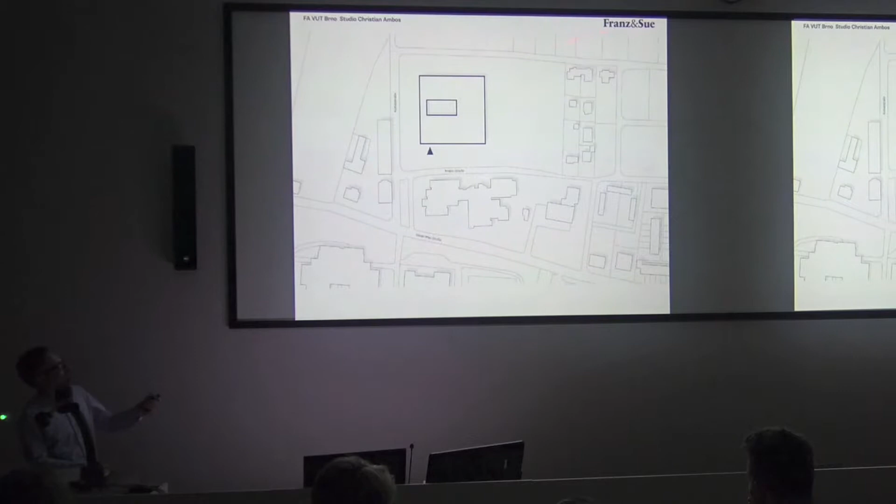Tyrol is a mountainous area in Austria, there's one main valley going through the whole province, which is very densely populated. But there is no urbanity within this, except from the old city centers. There's just urban sprawl going on all around - you have a lot of small houses, bigger houses, and some structures. You cannot really - this is a hospital - you have all kinds of different structures, but our program was so huge that we found it's not...

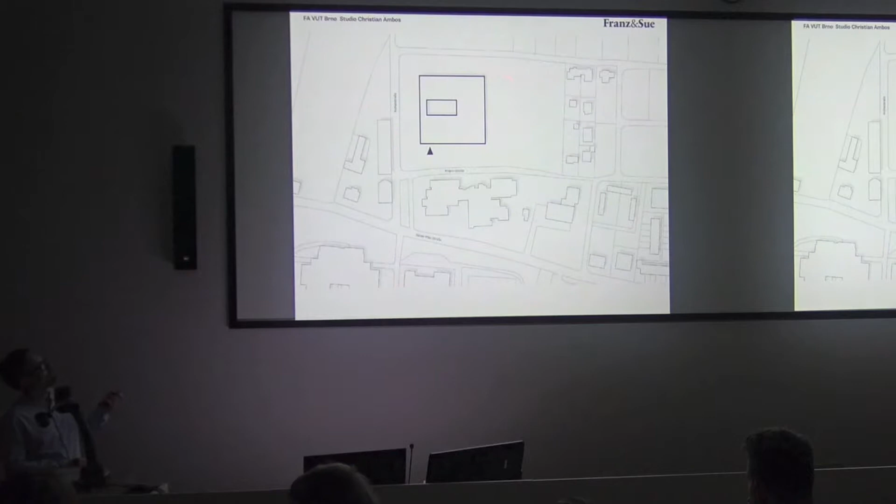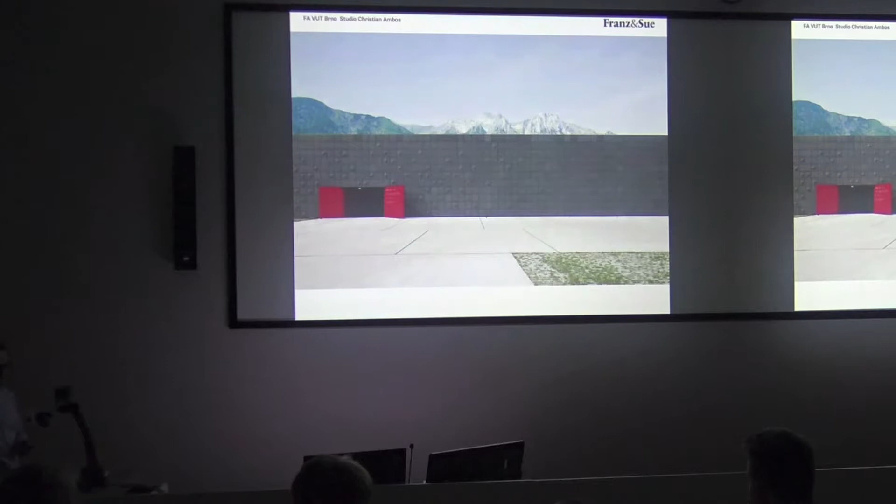It would be necessary not to show up everything on the top level, but to place the program, to dig it into the earth. So you see only 1/3 of the program on the outside. It's like a strong, rigid cubical design, which is strong to the outside and has two faces. There's only one entrance, you can see here, and everything else is more or less closed or oriented toward the inside. This entrance door can also be closed during the night, so it's like a big safe container for all the very precious archive for the Tyrol museums.

The idea is having a strong outside, but designed like onion rings. On the outside you have all the archives that don't need air and light, and we have the offices and workshops orientated towards the courtyard. So the courtyard, the inside, is completely different to the outside. And there is one ring corridor going around.

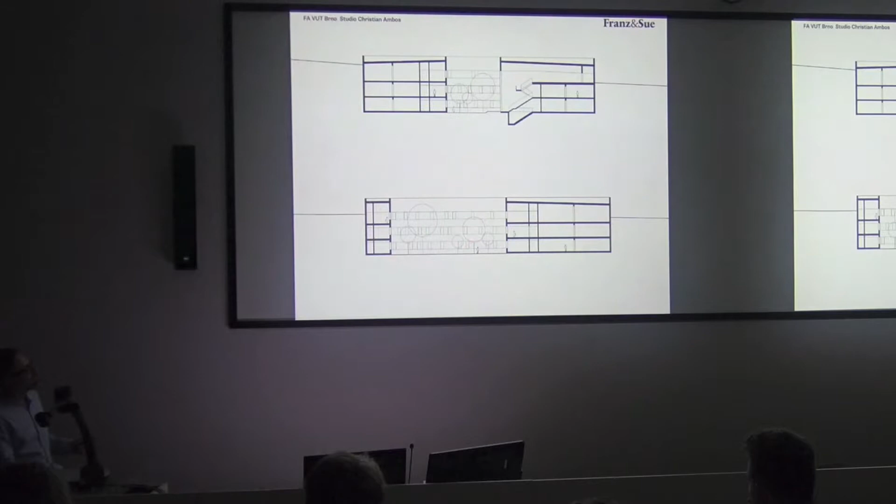This is the entrance. From the outside this is like the surface. You're entering here, and you see a one-story building, which is cut into the earth. On the inside you have a completely different experience. When you stand down there, you don't think that you're 3 stories underground.

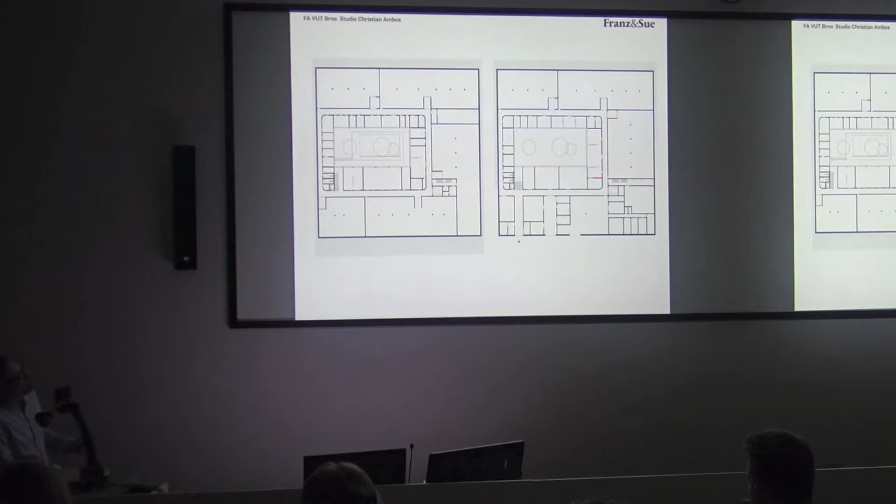This is the ground floor entering here, with the corridor going around, archives on the outside, workshops here, archives here, and the offices and workshops for people towards the interior courtyard.

When we design, we always think of values in terms of architecture, and what kind of value would represent this building. It's foremost consistency. With all these precious items inside, you should say to the outside, this is a safe building. Everything finding place here is safe. And also self-confidence.

This is the side view, the facade to the side. There's one contribution to the need of having air in the workshops area here.

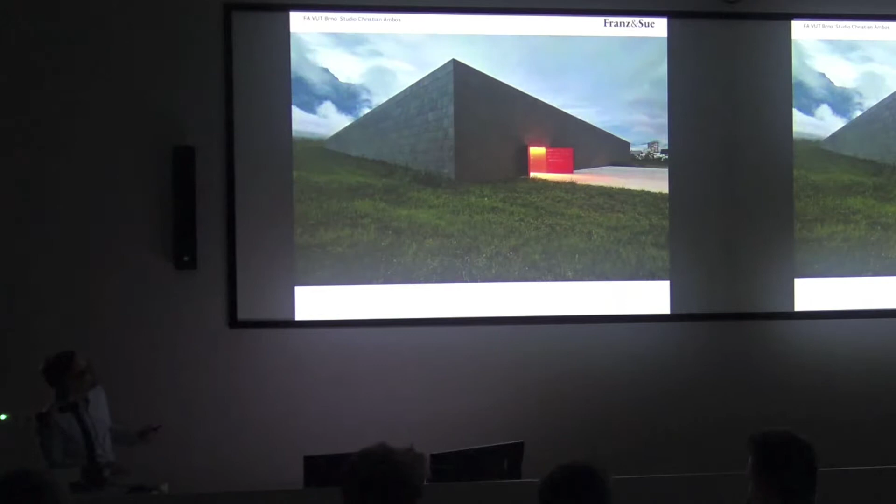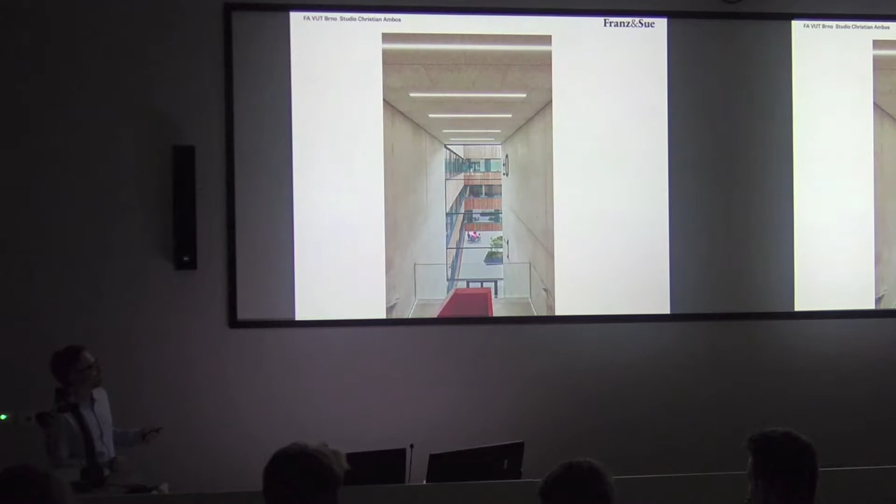The entrance, and this is the staircase. When you come inside the building, this is like the ground floor, level 0. You're going down 2 stories, and here you can already see the interior courtyard.

There is one thing for easy orientation. This kind of corridor always has glass doors that you can see from the corridor towards the inside courtyard, and they give an orientation of where I am. The good thing about digging into this whole structure is that you don't have any climate problems.

You need a stable climate of 16 degrees with a certain humidity, and this is provided by placing like 2/3 of the facade into the earth.

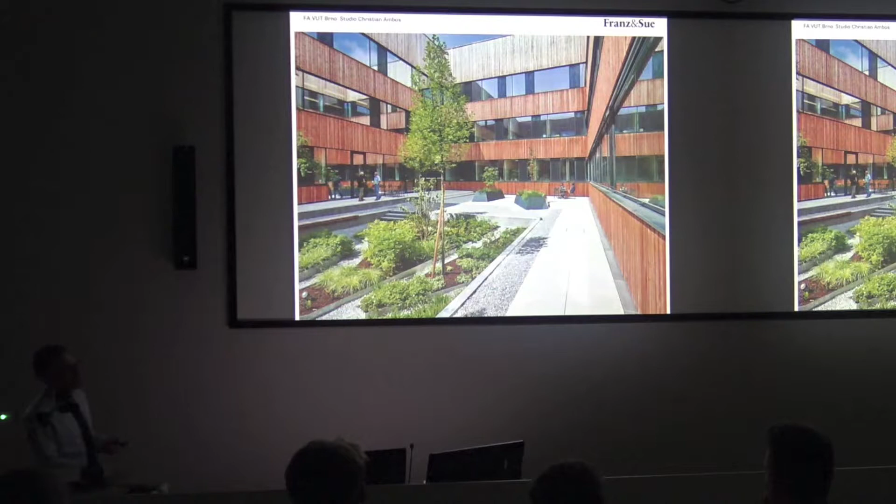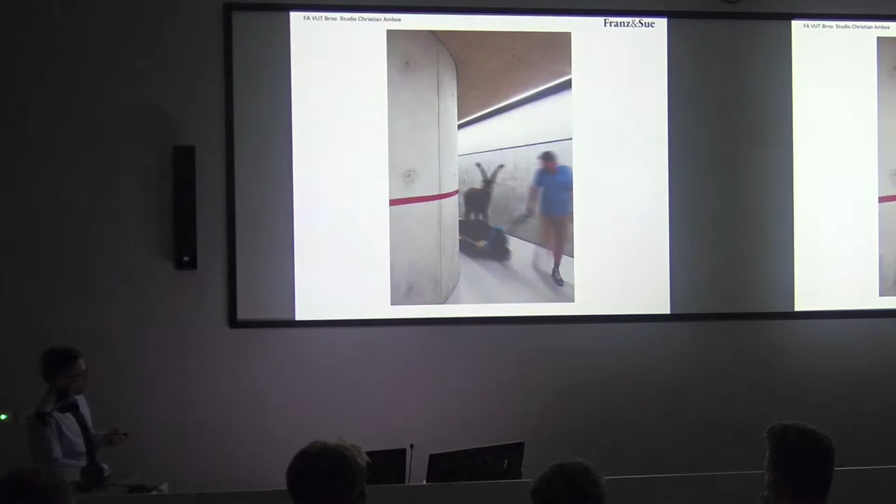This is the interior courtyard, which is somehow designed like a cloister courtyard. And here you can see some pictures of the archives for paintings. We also have stuffed animals there, which is a bit strange. A second project I want to show you is the Provincial Court in Salzburg.

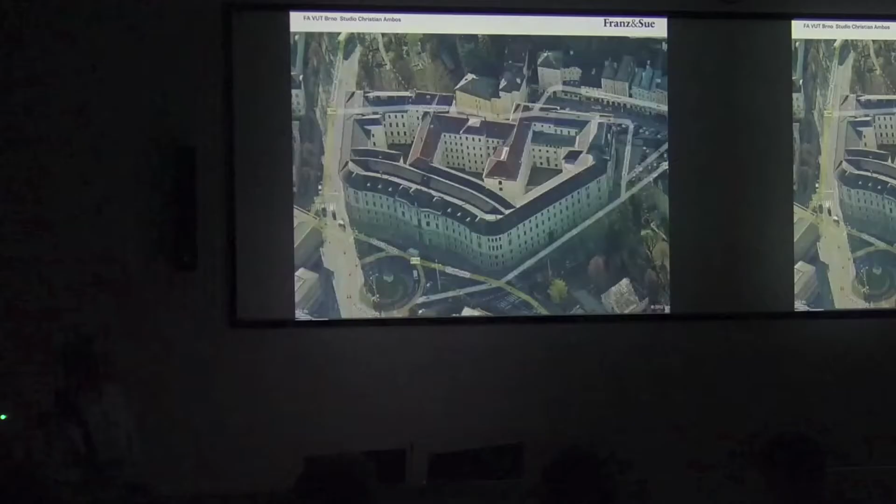This is a building that exists from 1905, designed by the architect Alexander von Wielemans, who did a lot of projects within the monarchy. I think there's also a project in Brno, a courtyard building. He designed this with the black roof courtyard building and the red courtyard prison.

The values of that building were representation, to show off, to show the majesty of law, to tell the people that everything which is decided in this house has value - it's not to be asked anymore.

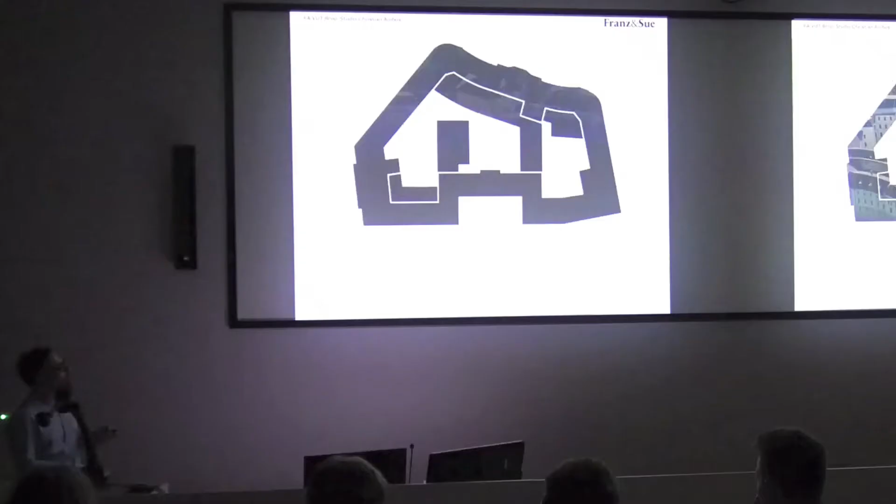We were lucky because the prison moved out, so the program changed for that reason. We could demolish these two blocks because they were more recently built in - the building itself is a heritage listed building. So we had the possibility to restructure the whole complex. This is the former Provincial Court, this is the prison, and we demolished all the buildings in the inner courtyard to create a new ring.

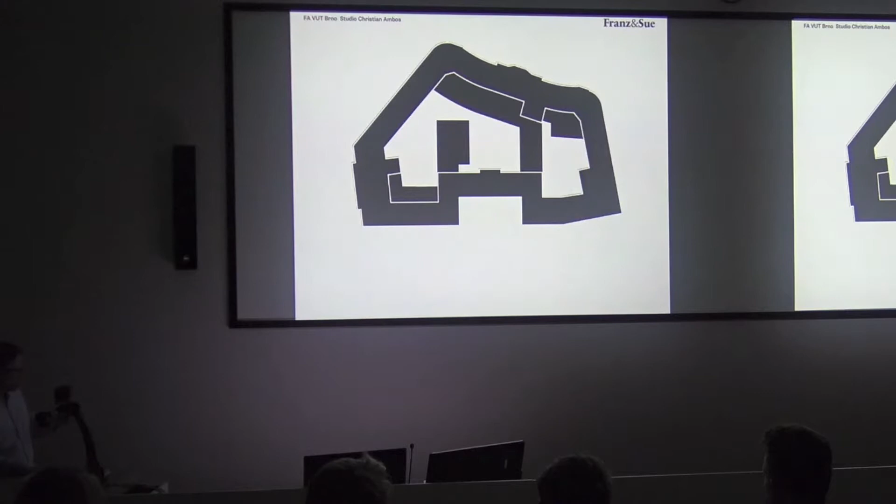There were numerous entrances towards the inner courtyard, but you couldn't use the inner courtyard. You could use only this entrance to get into the building, and all the other entrances were closed for security reasons. So we introduced a fourth entrance and made an open space, a public space here. You can enter from four directions, cross the building complex, and have a small break here.

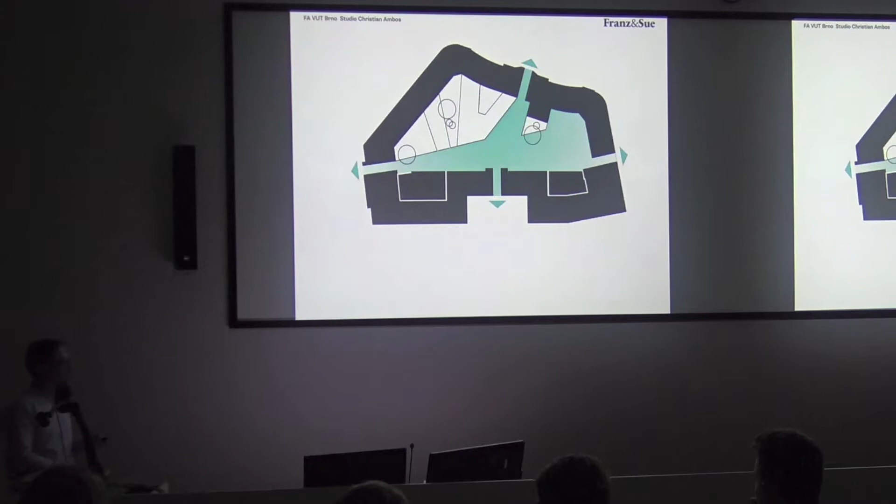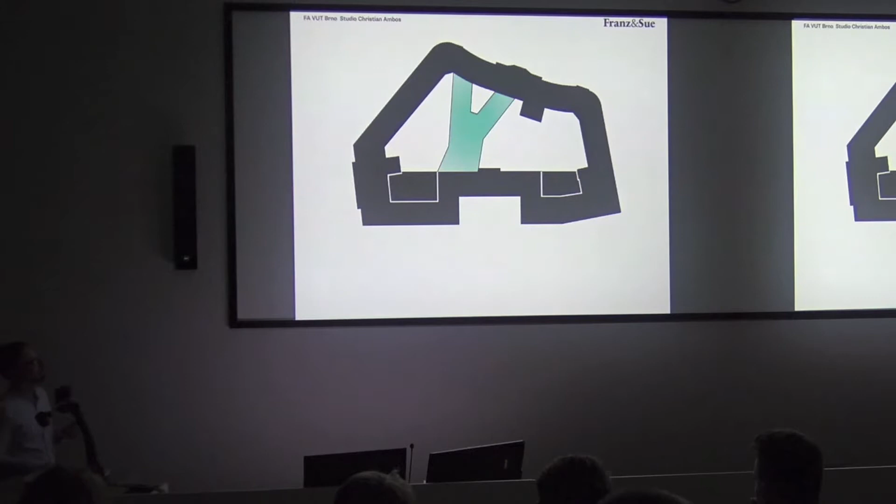It's like an interior courtyard. The next step is we built a new Y-shaped building in the inner courtyard that contains all the courtrooms. So except for three historic courtrooms on the outside ring, all the offices are situated on the historic part, and all the courtrooms are within this Y-shaped new building.

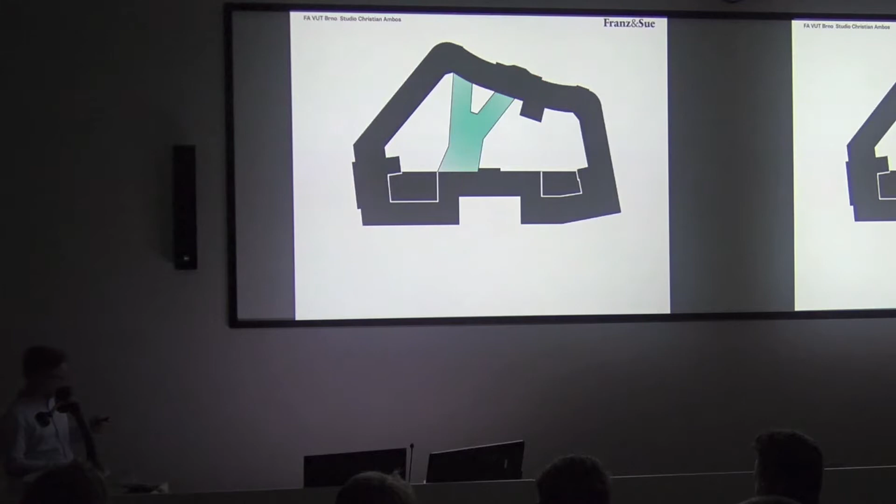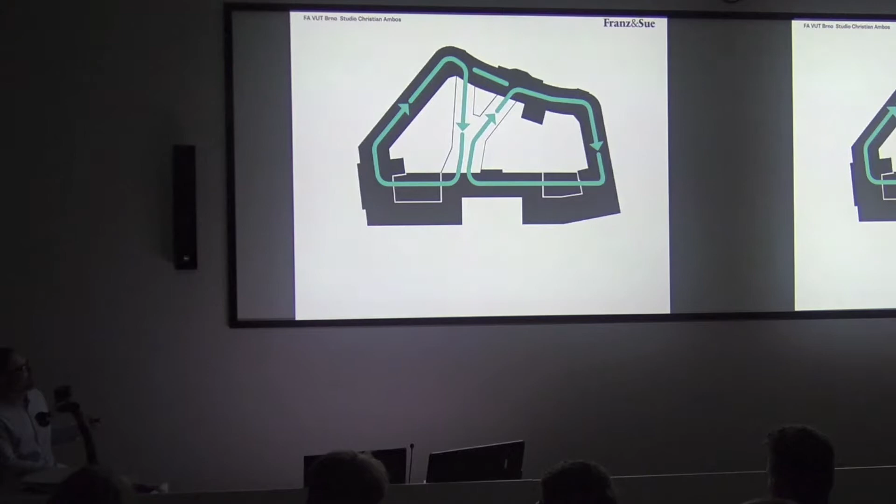The whole structure made it easier for orientation. You can now follow where you are if you walk in the corridor, and you can have the big round or a small round in the Y-shaped building. As you enter, there's already an atrium going through all the stories, so you oversee the building quite easily, even as a foreigner who doesn't know it.

What are the values we want to transport with a new courthouse building? A court should be independent, and it should have equidistance to all the parties that take part in a trial. You should trust on a verdict. So accountability and transparency is something quite important for a courthouse building.

And things that didn't change - you still need dignity. The people have to accept what's going on in a court building. So dignity and self-confidence is also a really important value for a court building.

The site plan, I already told you. We have four entrances and one main entrance into the building. When you go into these historic entrances, you just bypass the building on the ground floor and walk into the inner courtyard.

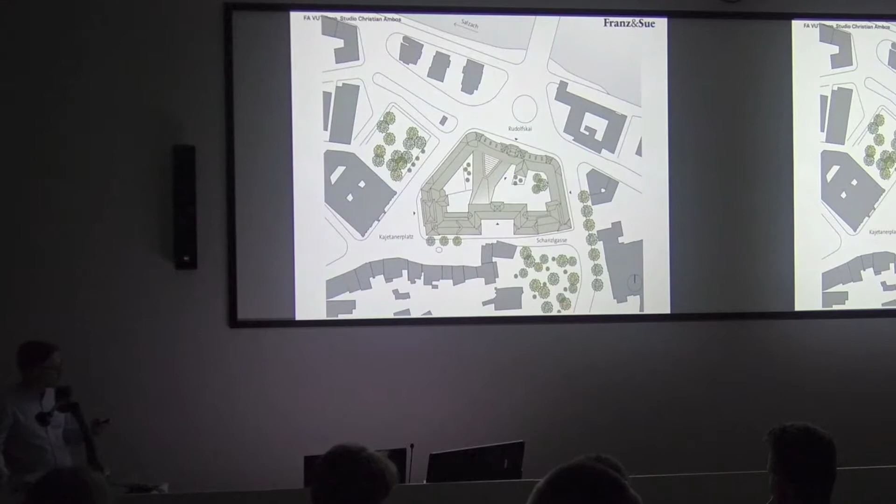As there are different levels, you enter onto the first floor, overpass here, and go down again into the lower courtyard. There's also an archive in the basement, which gets some light with this court.

When you enter, there's a security pass, and here we've got the service center, the first place where you can go when you enter the building. And here you have the atrium. The atrium is five stories high, and it provides easy accessibility and the idea of how this building works.

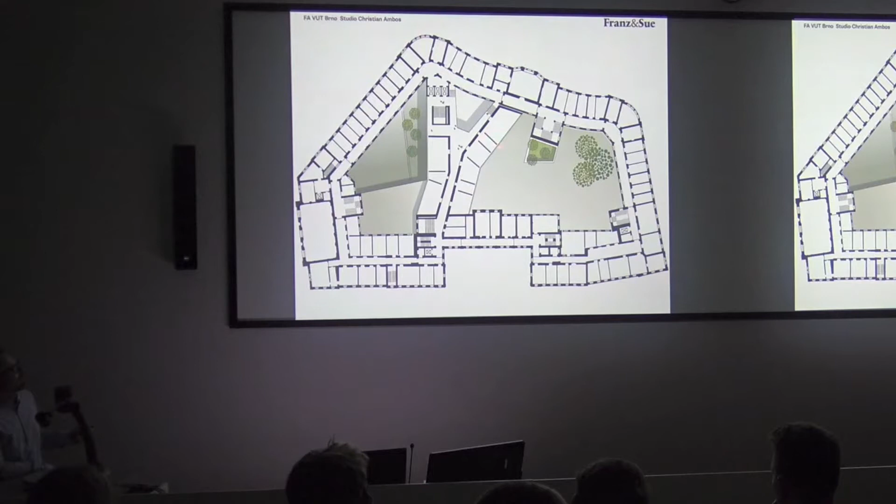Here we have a regular story with six courtrooms, and always a meeting room in between two courtrooms.

You can see into the courtrooms, you can have the idea of what's going on in there. Trials in Austria have to be public, so everybody can attend, and you can already get the idea of what's going on from the outside. So there is something going on which should not be concealed - for that reason, we make it visible.

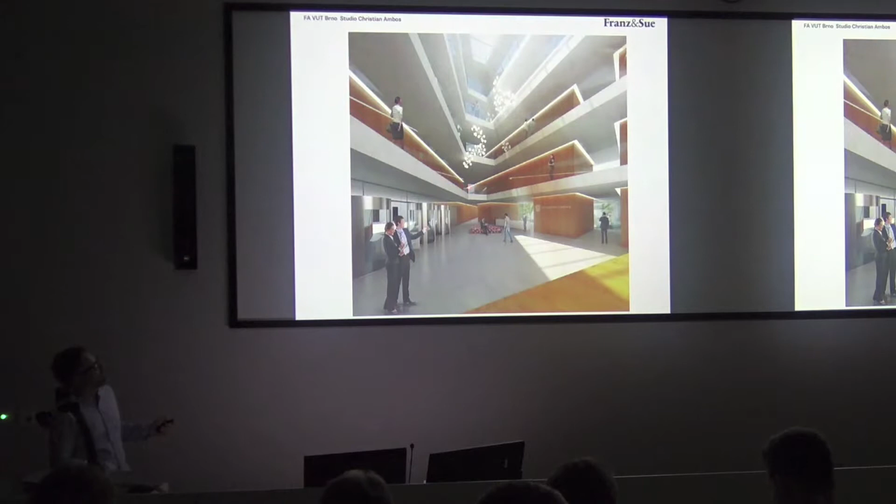When you enter through the safety control, you are within this atrium with a glass roof, so you get some light in, and you can already see the areas in front of all the trial rooms.

This is what it's looking like right now - this is the Y-shaped building. On top of the building we have a small cafe with a terrace. It's quite a scenic construction style, I guess. Here you have the idea of this Y-shaped building.

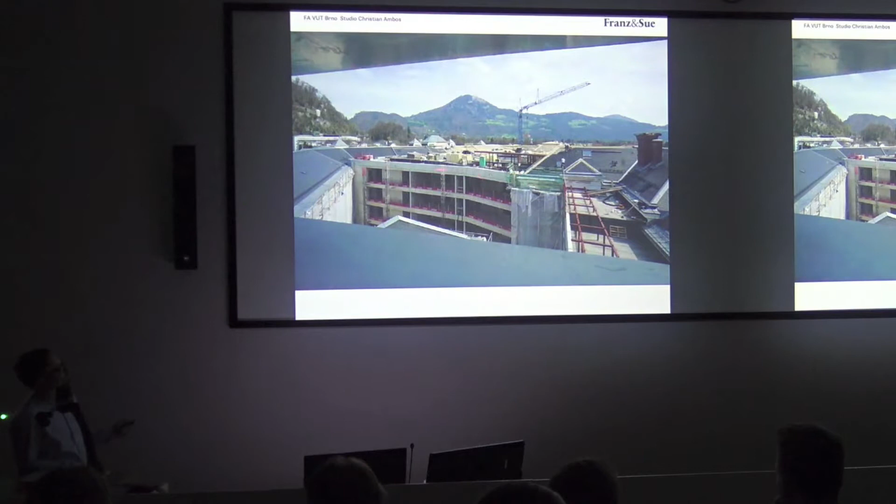The idea is that there are some sort of slabs that are shifted within the courtyard, and that are cantilevered or make a bridge within the old exterior walls.

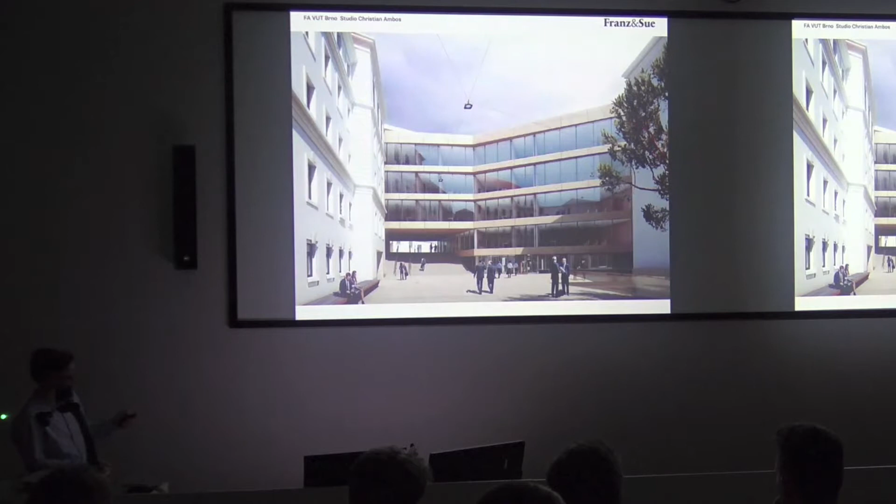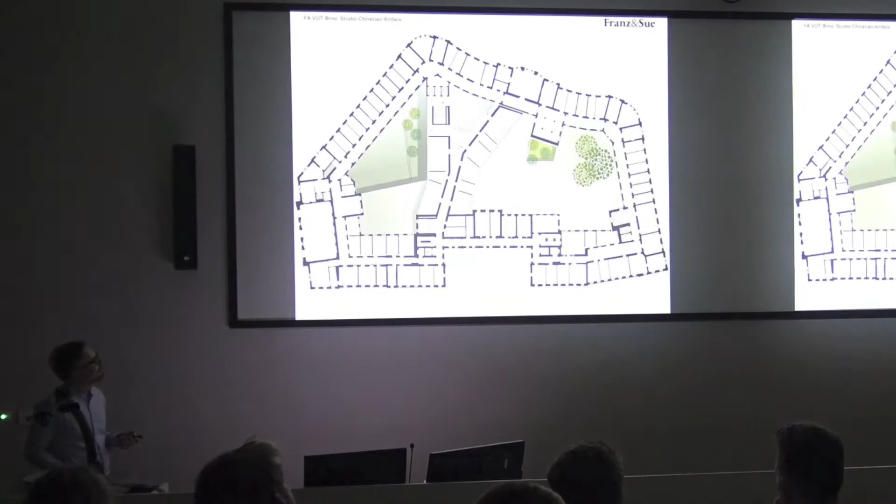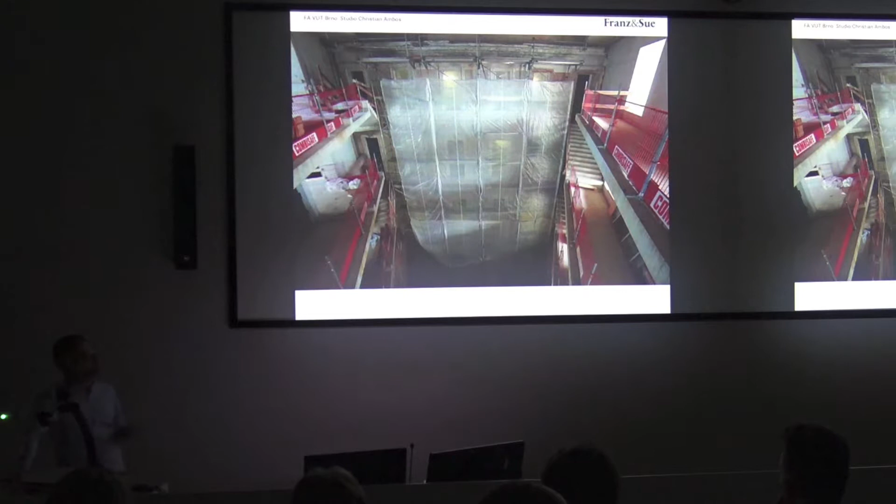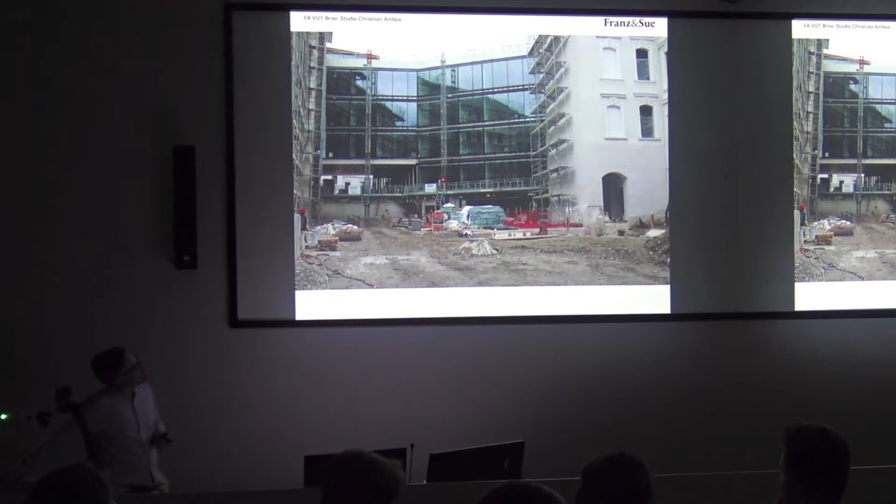Here we have the glass roof, and this is a meeting room right now in the Y-shaped new building. Yeah, this is how it looks like from the outside right now.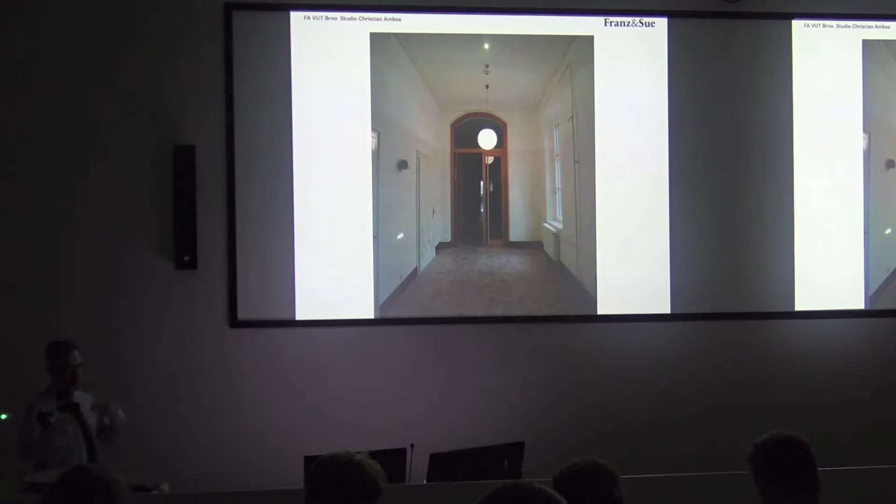You saw mostly parts of the new part right now, but it's also about 20,000 square meters of old building, a historic, listed building, and we are dealing with a lot of different kinds of tasks and issues with an old building. It's also a very interesting issue for me to think about how to work with an existing building, how to bring in a new design with some small changes, how to think about the way an existing building is working in a new way.

Another project I want to show you is quite a difficult task: a detention center for illegal immigrants.

A few years ago, when the competition was published, we were thinking, is it a good thing to take part? But we saw that the assignment was quite open, and what was asked had a very humanistic approach. So we said okay, we could enter. We can make a good contribution on that.

This center is for people who are not criminals, but they have to be detained as they are already in the last step of their asylum procedure, because the authorities think these people will live as submarines once they have a negative asylum decision, and they are not allowed to stay in Austria. Legally, some are detained in order to bring them back to their home countries, but most of those people didn't do any crime. So we said, we don't have to deal with criminals here. We have to deal with people, as criminals are also people, but we have to show them, in this last moment while they are in Austria, that also with these people we think it's necessary to have a humanistic approach.

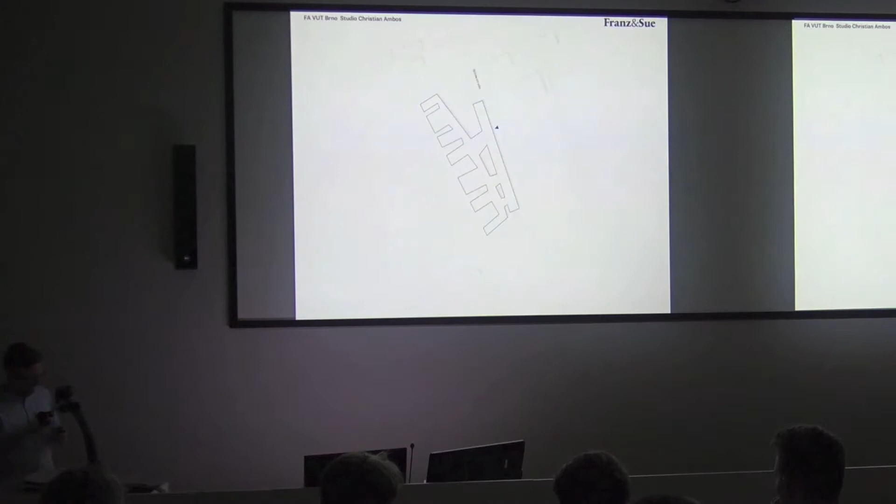The assignment said you don't need to build a wall like in a prison, not on all sides. You only have to build a wall toward the street. On the other side there's a creek running through the valley, and a steep mountain with a forest, so on that side you don't need the wall. You only need it on the street side.

We said, okay, we use the design of the building and make two parts. One part is the building for the authority, the offices, with a very rigid facade, and that facade is already our wall. On the other side, the more freely designed area is for the detainees, where we always have a courtyard adjacent to the rooms. The middle part contains the facilities, like the library, the fitness room, the room for religious services, and the shop, so this is where the offices and the detainees meet.

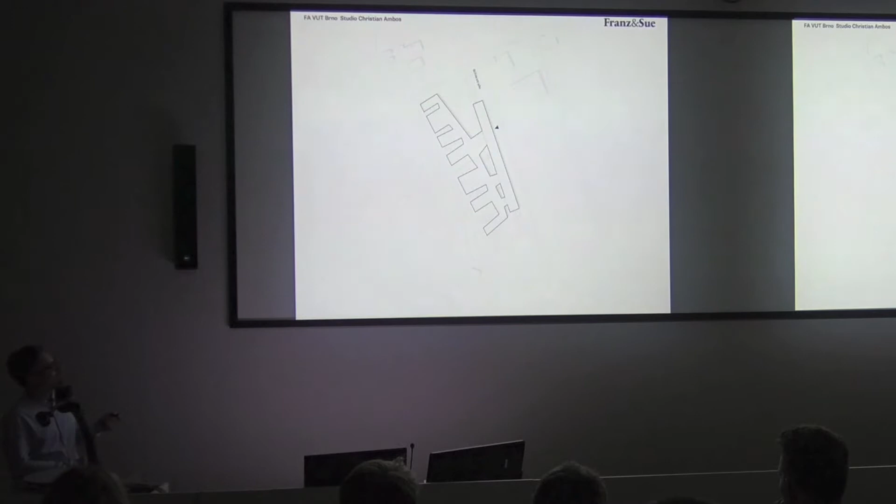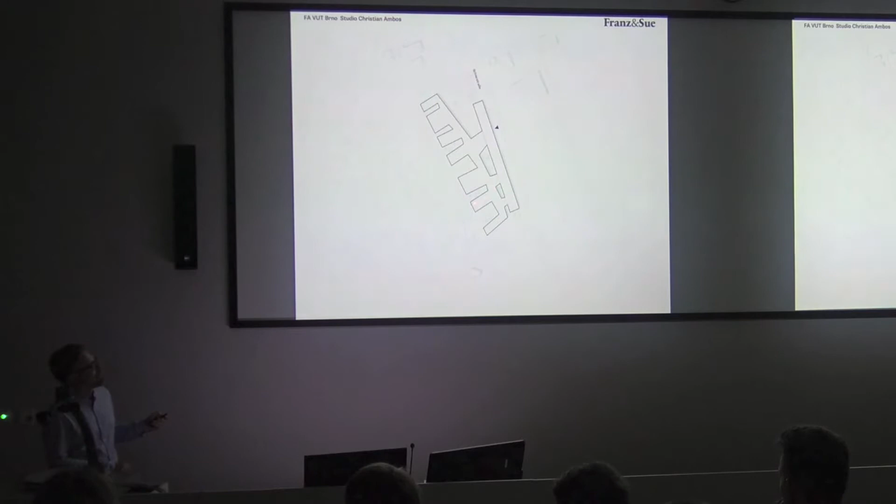Usually the typology of a prison is one finger with cells on each side, but we wanted to split it up. We have one unit on a U-shaped courtyard, always U-shaped, so you can see into the courtyard, you can walk into it, you can use it. The people can move freely within their unit. There's one unit here with an outside place they can use, a kitchen, and besides the sleeping rooms, several other rooms they can use. Here you can see the connection between the rigid office building and this kind of dwelling unit, where the facilities - the meeting room, prayer room, shop and so on - are located.

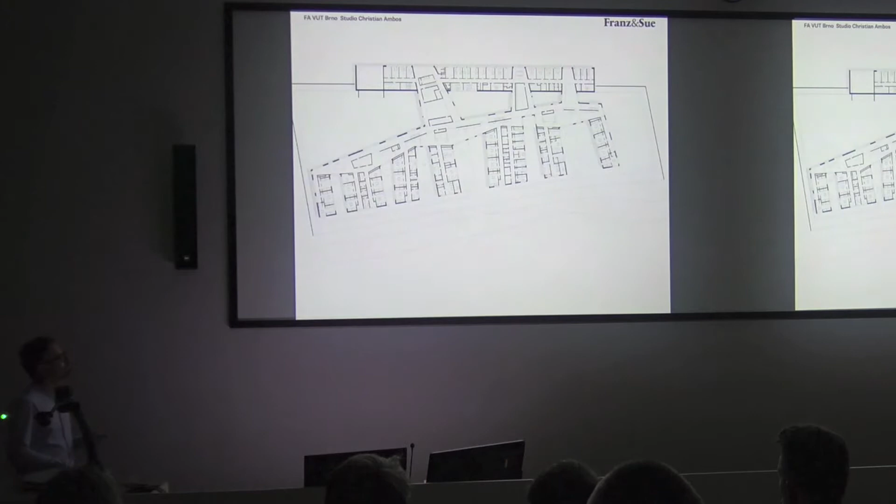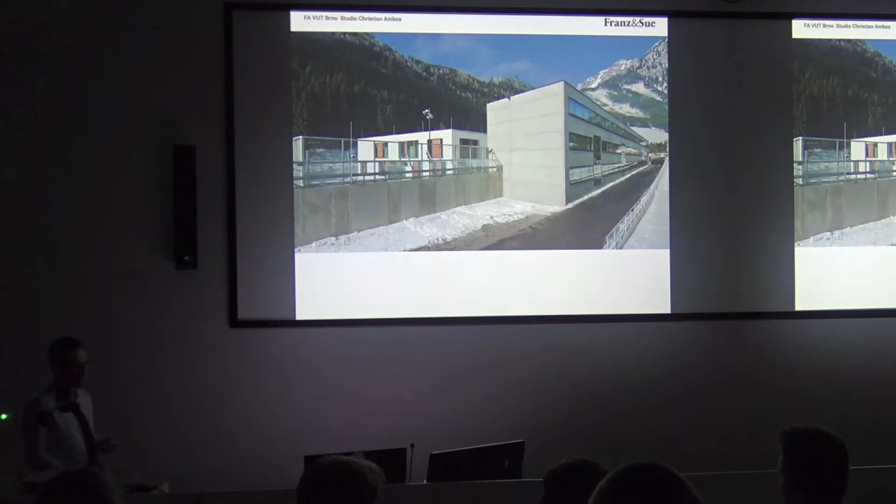We dealt there with little details. It doesn't work like in a prison - the guards cannot shelter themselves. When they are in this guard unit, they are talking to the detainees at the same level. There is no upper or lower level, and people here can see what's going on inside.

So these were 3 public projects we did or are doing right now, and now I want to show you 3 housing projects we were doing, or are currently doing, in Vienna. I want to emphasize on each project a specific topic.

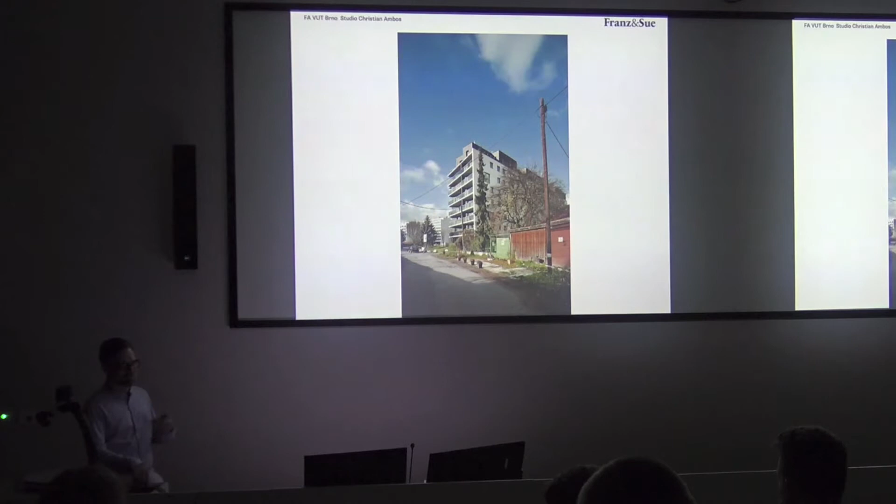This one is called Mittelweg, a housing estate for about 80 apartments in Vienna, placed in Simmering, a district with the world famous gas tanks. The whole area is being built up right now with multi-story housing, but in the vicinity there is still greenery, small-scale gardens, and old industry which is on the decline.

So this is the lot, and we were asked - the law says you can build a large building here and a point building here - and we developed two kinds of typologies for these houses.

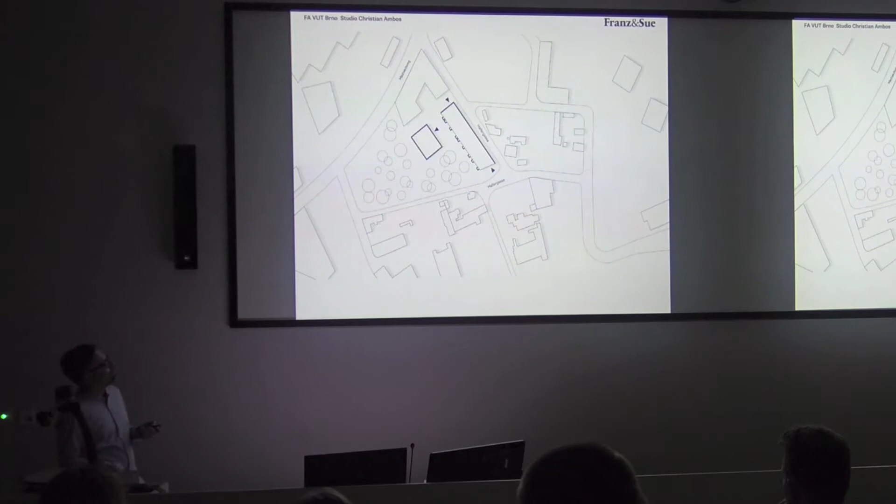This is the ground floor. The slab building is for houses, mostly small apartments, and the assignment asked for doing houses especially for elderly people, but also being able to change typology within the house, to have small apartments and different typologies within the house.

So the typology we proposed: on the south side we have deep, rather small apartments. This is the ground floor, so you have facilities like bicycle rooms and workshops onto the street, and 3 staircases with elevators, and the main entrance here. You can walk down the street on the inside to get to your elevator, to your apartment. The ground floor apartments have a garden of their own.

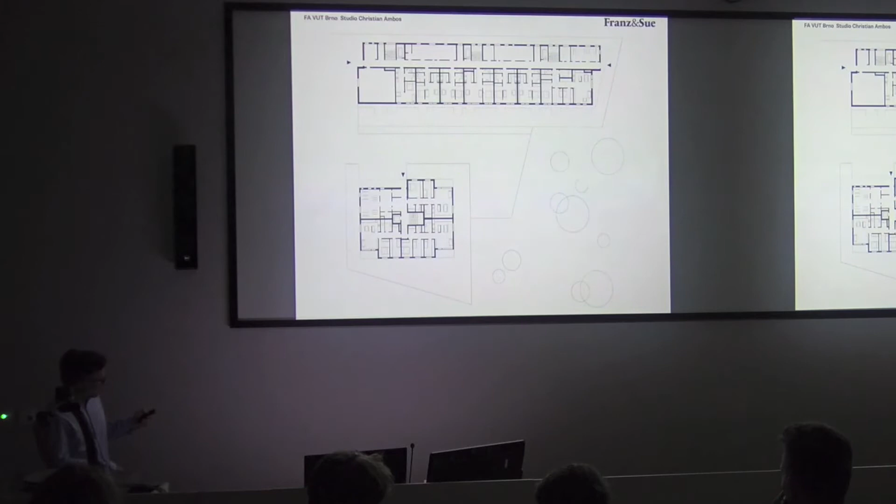On the upper floors, the typology changes. Right now we have a three span here - 1, 2, 3 apartments - so we have bigger apartments here and small ones towards the south, and the bigger ones have cross ventilation.

And on this building we have bigger apartments. We always have apartments which on the corner have a free space - a terrace, balcony or loggia - and have 1, 2, 3 sleeping rooms and the living room, or 2 bedrooms plus the living room.

The more interesting part is this slab here, because it has two faces: one towards the street, and one towards the park. Towards the park is the south, so we introduced a balcony area here with deep balconies running all along the facade. You can exit from every room to the balcony, and you also have a bigger space for a table or so in front of this.

But the important thing is we can change typologies here. Different from the last story, where you have the big apartments with cross ventilation, we also have small apartments again toward the south, and we have a new typology - we call it the mini loft - because it's faced toward the north, but it's not so deep, so you get more light into the apartment.

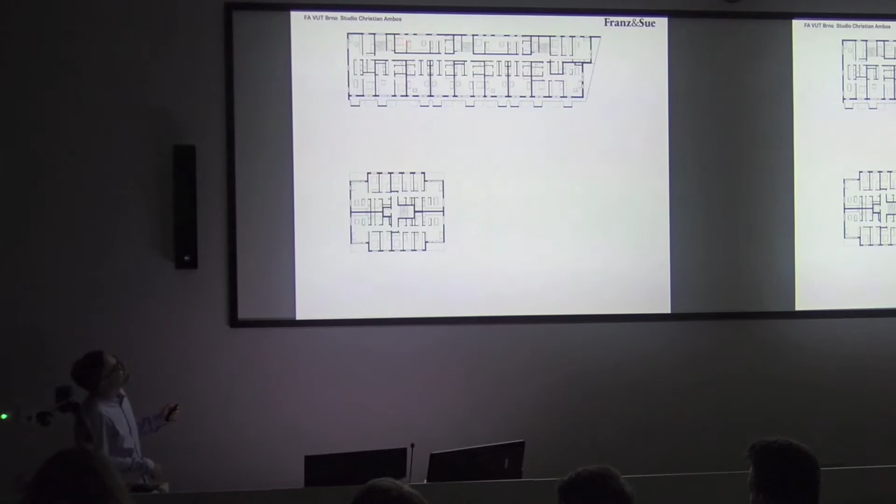You get in here, and you have the distribution in the apartment along the facade. So we have different faces of this building: to the south the open facade with the deep apartments, and to the north the more closed facade with the not so deep apartments.

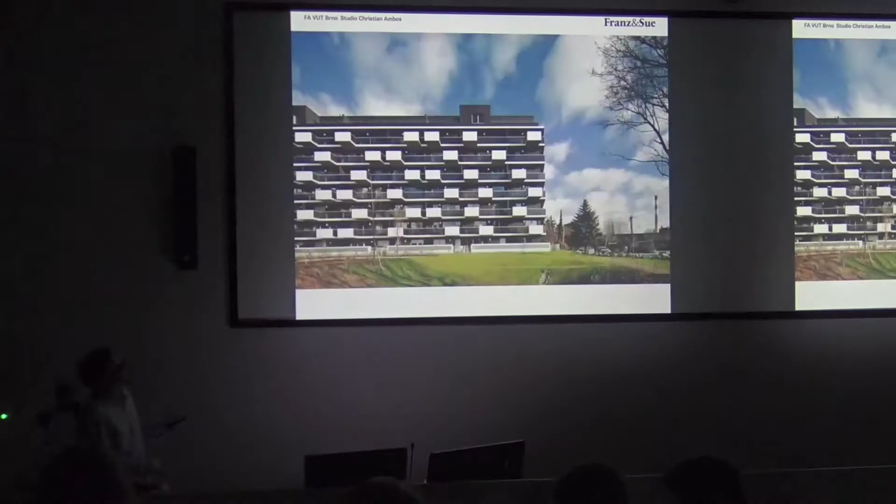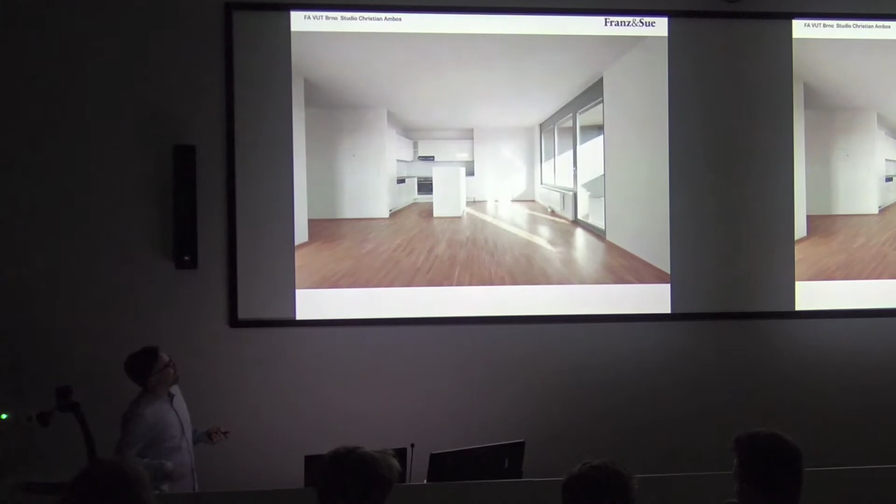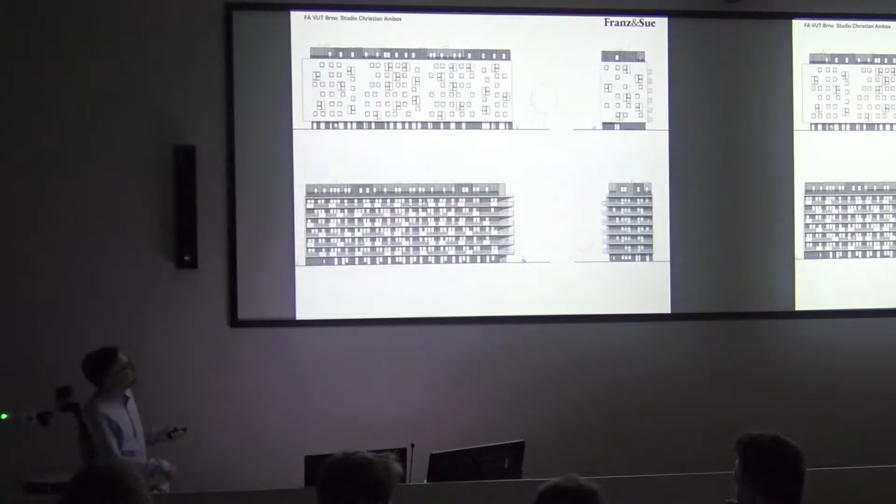This is how it looks on the inside - a small apartment now with a loggia and a kitchen unit. The point was that you can easily adjust an apartment, you could change the typology here. You can make out of these 3 or 4 units, 1 or 2 different units with cross ventilation, even at a later point in time.

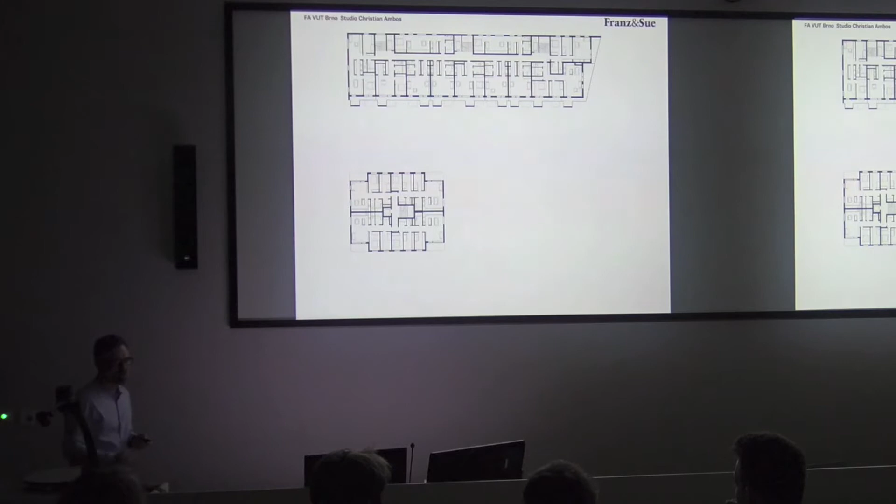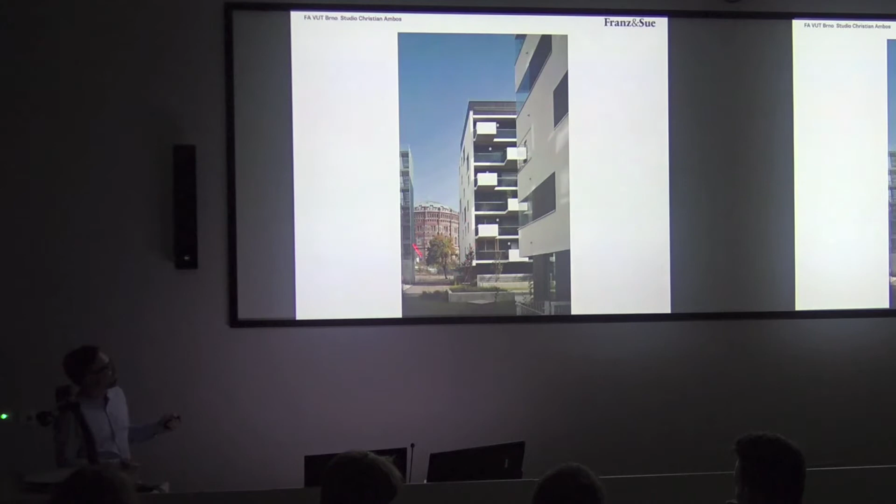Yeah, this is the vicinity, the gasometer in Simmering.

Another project which is built right now is a housing project in Bruno-Marek Allee in the Nordbahnhof, a former rail yard which is being developed right now. It's going to be apartments for up to 20,000 people. Half of it is already built.

But the problem in Viennese urban planning is always that the units are too big, and you cannot create a neighborhood when your house is 100 meters long and has 100 apartments - you don't know your neighbors anymore.

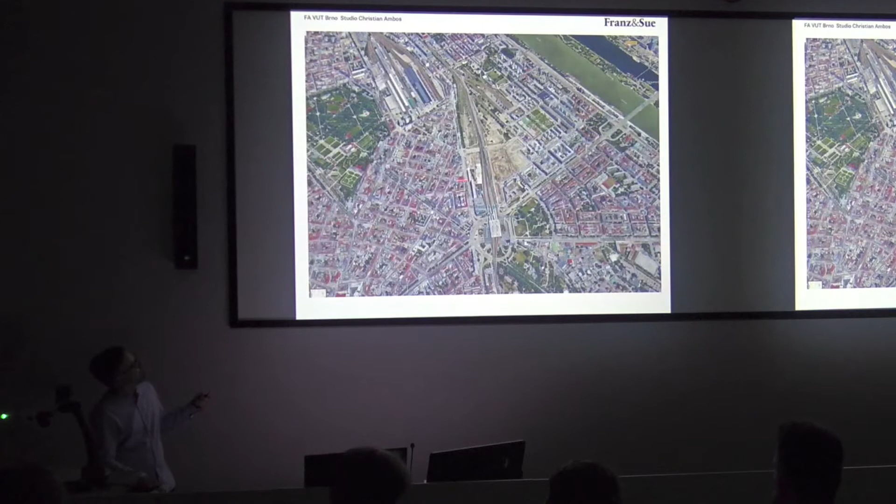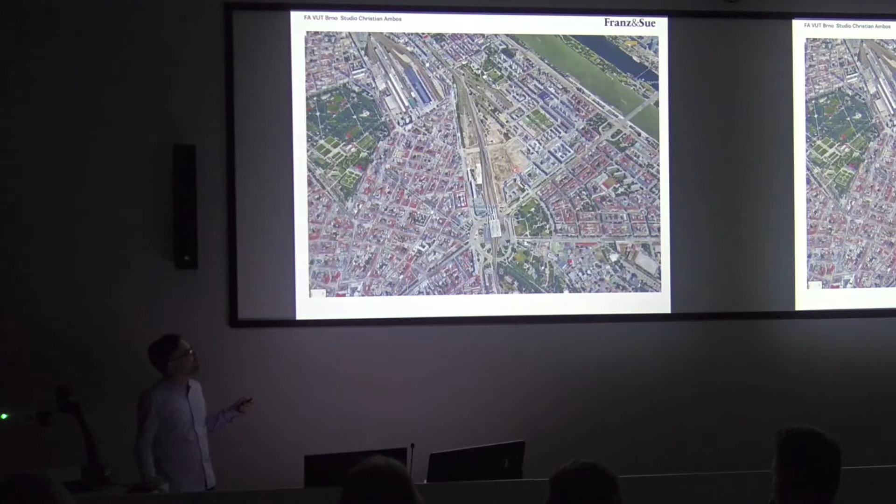This is the Nordbahnhof, the Danube. This is the railway station right now. Here we have the city center, and this is the former rail yard. About 50% is already built up, and our lot is here, and it's going to be on a main road of this area.

There's going to be a tram car going through this road, and it's going to be a shopping street here. Our lot was this size, and we said, okay, we have one contractor, one developer, but we need to split it up into smaller units, because you have to be able to recognize your house.

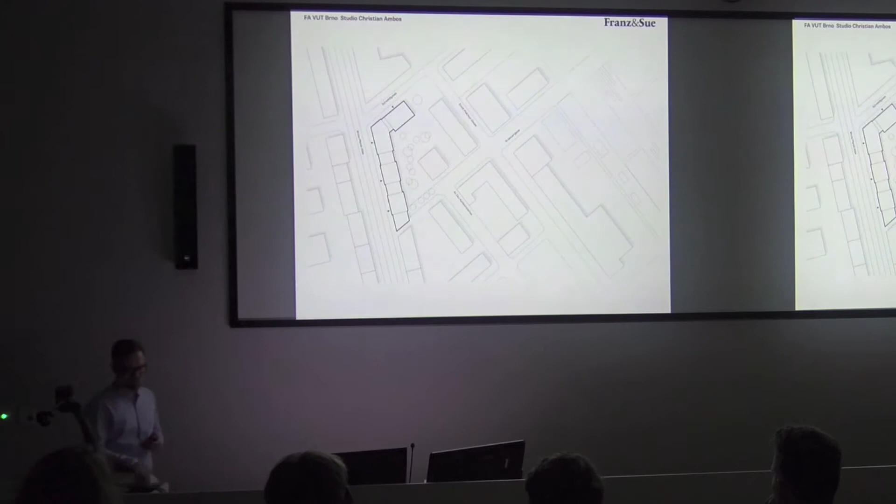So we played a little trick. We widened up the facade and have setbacks again. We made this with a little trick in the Viennese building laws, and not only by the facade but by its height.

So this is the facade towards the street. We have higher buildings and lower buildings. And the higher ones, they have apartments towards the street with loggias. These areas are used as roof terraces. And on the ground floor, we have the possibility to house several shops.

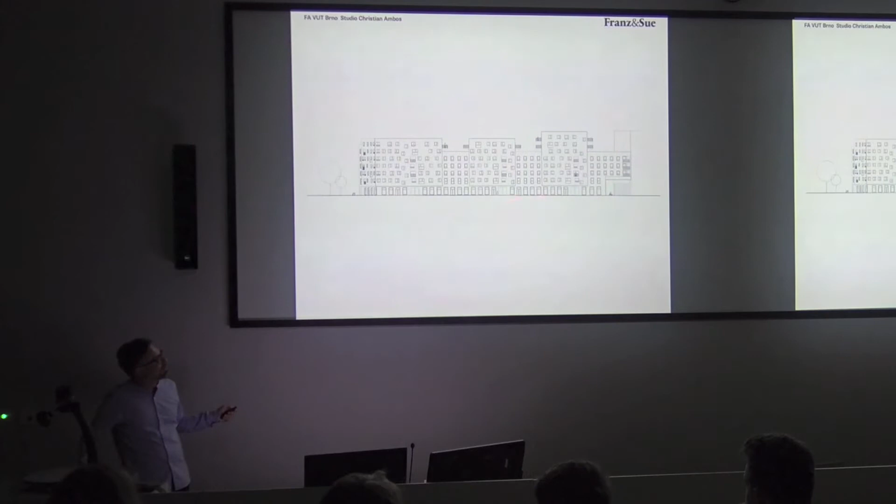This is a floor plan here. We also have several staircases with elevators, and we always have apartments facing the street, apartments with cross ventilation, and apartments facing the courtyard. It's a bit in a similar typology as I showed you before.

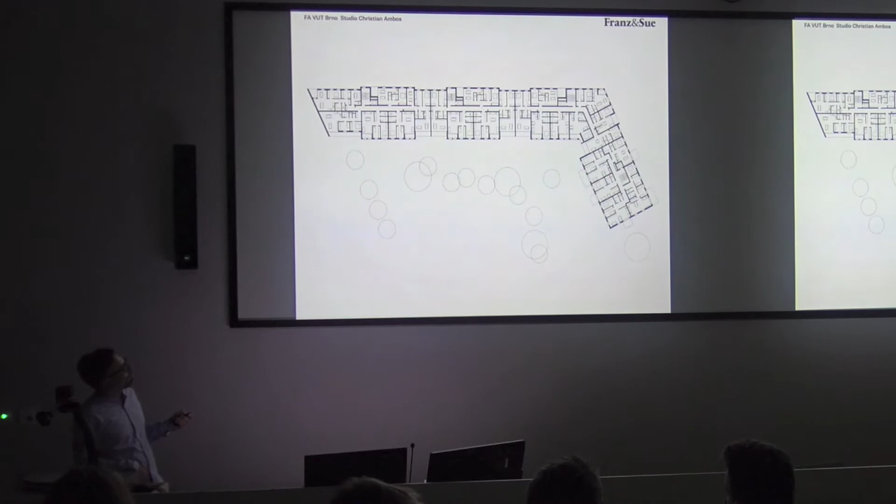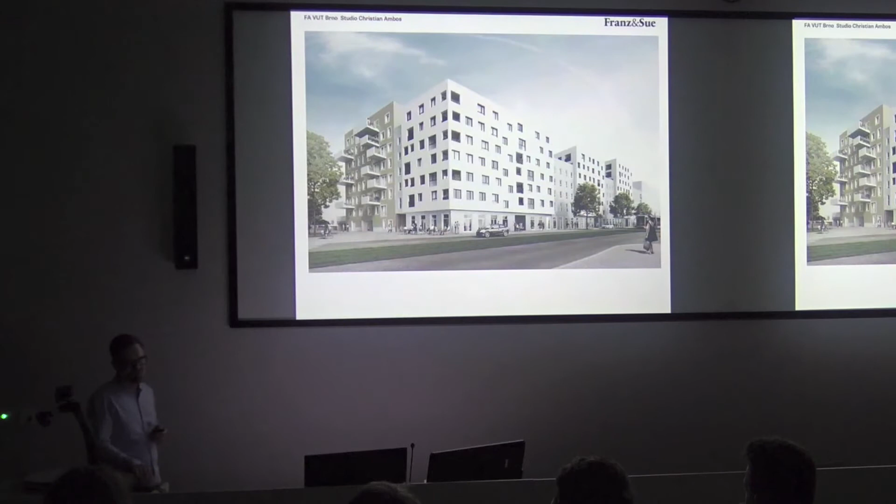So there is nothing going outside the facade. All the loggias are integrated in the facade, except for this building. But this has to do with the Viennese building law. These are rented apartments, and these apartments are sold. As you can ask for money for a loggia in a lease, you cannot do that when you sell the apartment. That's the reason why Vienna is looking like that.

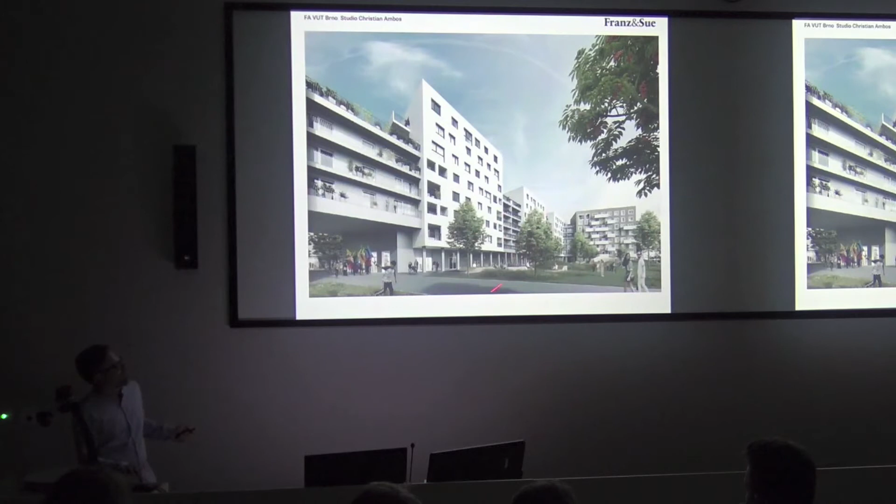This is the back. In the back we also have some houses with areas where we have loggias and areas with a solid facade.

The third housing project I want to show you, it's not really a housing project, but it's also a project in an urban development area. It's in the Sonnenwendviertel, which is also a former rail yard, the former rail yard of the Central Station, or the South Station as it used to be called.

It's an interesting project because we are not only the planners there, but we are also the developers.

We were looking together with colleagues to find a new office, because as I told you, working in a team is quite efficient and helps you. So we were thinking with colleagues from three other offices about how to find a new office or how to build our own office, and we were applying for a lot which was sold by the Federal Railway Company, and we had to hand in a concept for that.

Our concept was to create a multifunctional house, because in this area right now they build up mainly apartment houses, and there are no offices, no shops, it's just all apartments. And that's not the way a city is working.

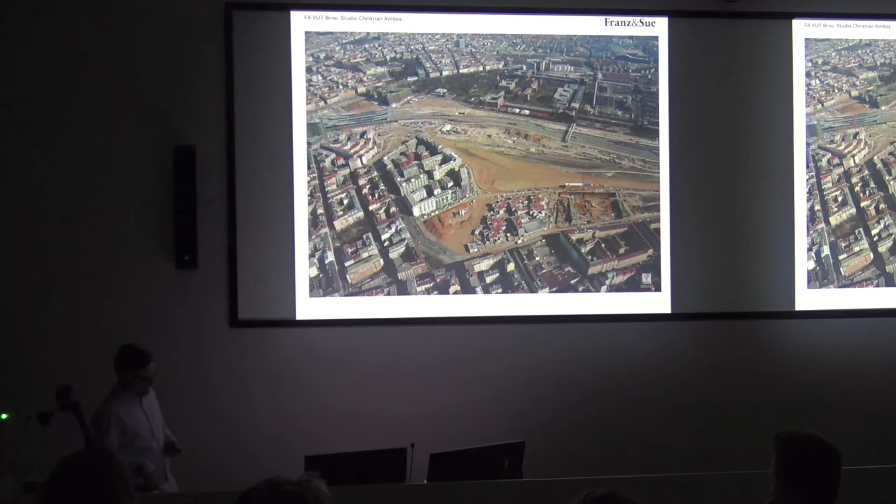So the city now thinks it's better to have a kind of mixture, and they asked for several lots to bring this kind of mix of use. The lots that are sold here have to make a contribution to the city, something more than just being an office building or just an apartment building. And we won this by having a multifunctional house.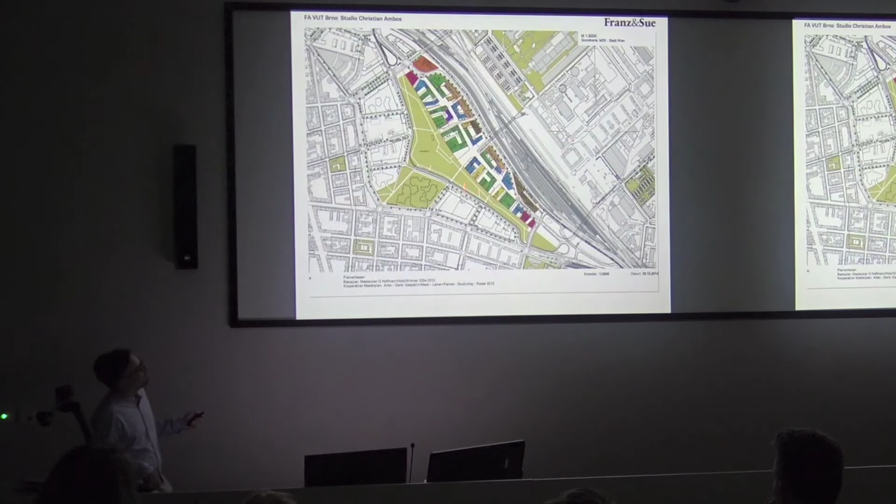But the urban situation is quite interesting, because here the street, this area, is a pedestrian street, so there are no cars within this area. There's only one car road in the back that delivers cars to this kind of garage building. But here on the park, and here, there are no cars. And here we have a kind of small little square.

So we thought about what we can bring to the city here. We said, okay, maybe it's not so easy to have in a newly built up area. It's not always easy to have a restaurant there, because you can hardly afford to have a restaurant there.

So we suggested having an office building mixed with apartments, where the same structure can have both offices and apartments. We said the ground floor is very important, but since we cannot afford a restaurant here, we have 4 offices with about 100-150 people working here who need to have lunch, so we can at least have lunch in our own cafeteria.

So we managed to have someone who's running the cafeteria, and this person has the economic safety of selling 100 lunches every day. This helps her to run the restaurant also in the evening.

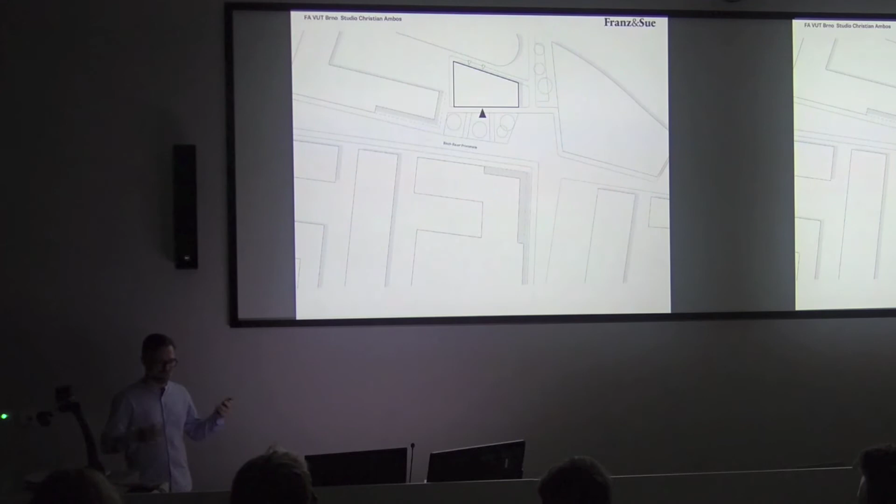The place is big enough, we have the assembly hall. The cafeteria also works as an assembly hall that can be used for associations around, that can be used for lectures. We called it Das Haus, the house, because we said it's going to be a prototype house that contains offices and apartments at the same time, and brings public life into the urban context, and is an architectural house.

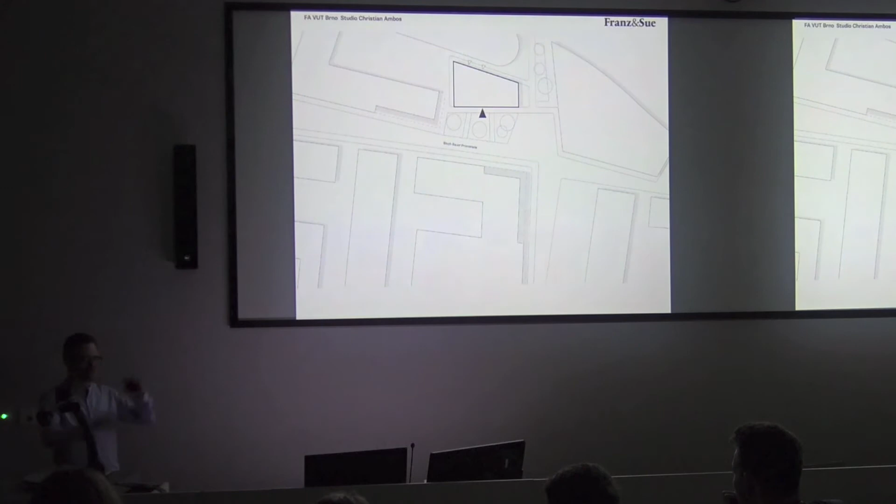As we are 4 architectural offices who built the house, we said, okay, we need even more architecture. So we have an architectural association, the Federal Architectural Association of Austria, housing here, and we have Architecture in Progress, which is a small corporation doing conferences and lectures for startup architectural offices inside the house also.

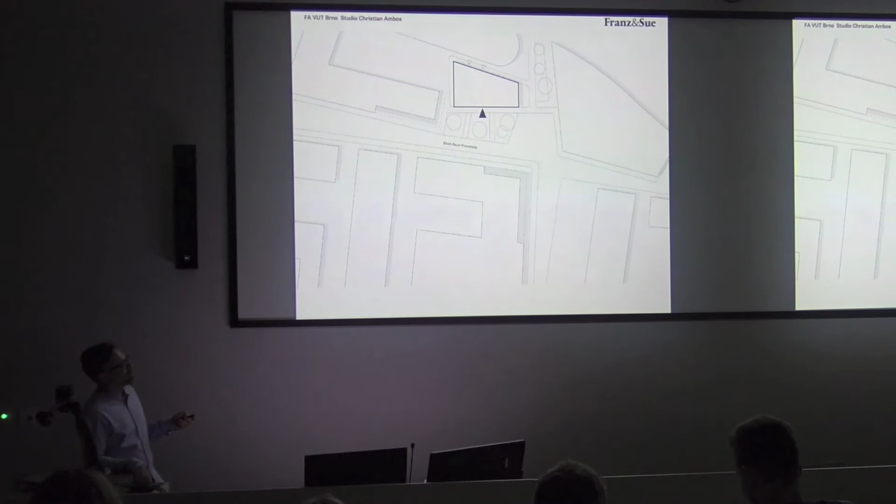So this is our mixture. We have our cafeteria, we have the Architekturstiftung Österreich, we have Architecture in Progress, we have Franz&Sue on 2 levels, we have a software company dealing with CAD, and we have 2 other offices here.

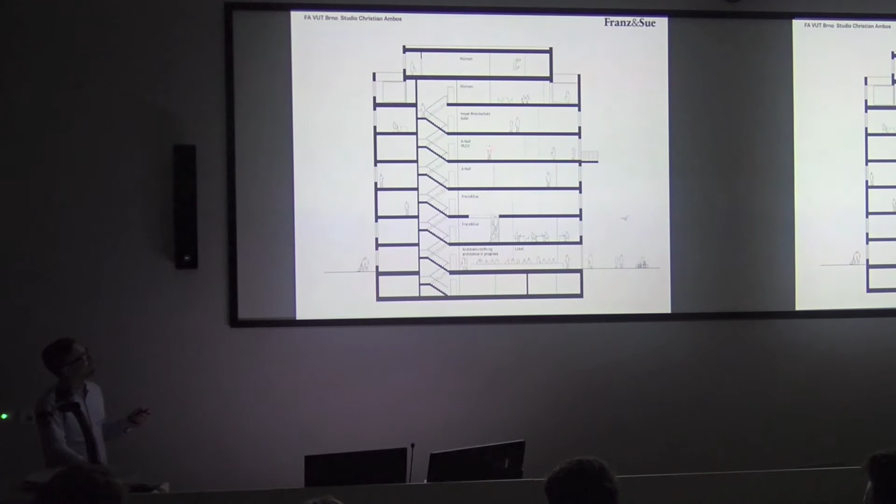And on top we have apartments, but we have the ability to build apartments within all the floors. This is the ground floor design.

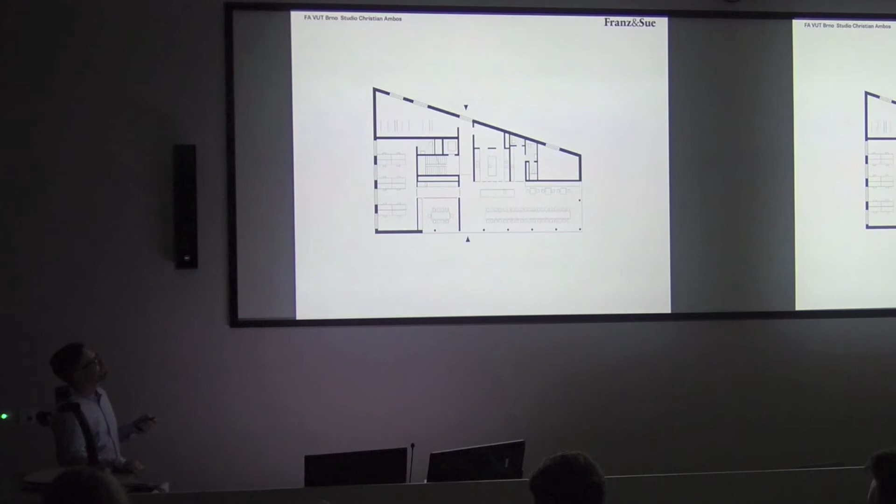We enter the building through the cafeteria, so we have one big table for 60 architects having lunch together. Here's the kitchen, here we have the public offices for the Architekturstiftung, and here the facilities, bicycle room, and we have the core, the staircase, elevator, and so on facilities.

We have designed 2 cores. There's only, as a load-bearing structure, the outside walls and those 2 cores. This is going to be our office. Our office will have 2 stories, and we will connect these 2 stories by having an atrium and a connecting stair, or even more.

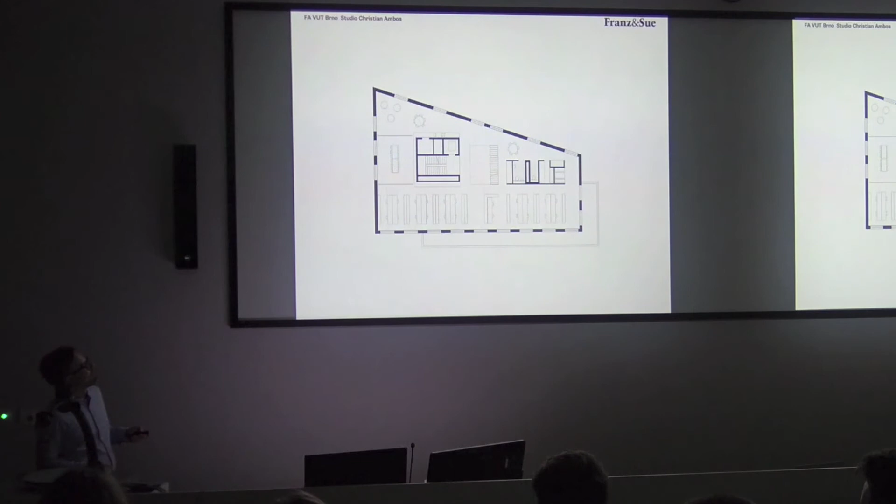And this is one story with apartments, where we have an apartment with a loggia, and another one with a loggia or with a roof terrace, and 2 apartments designed as maisonettes.

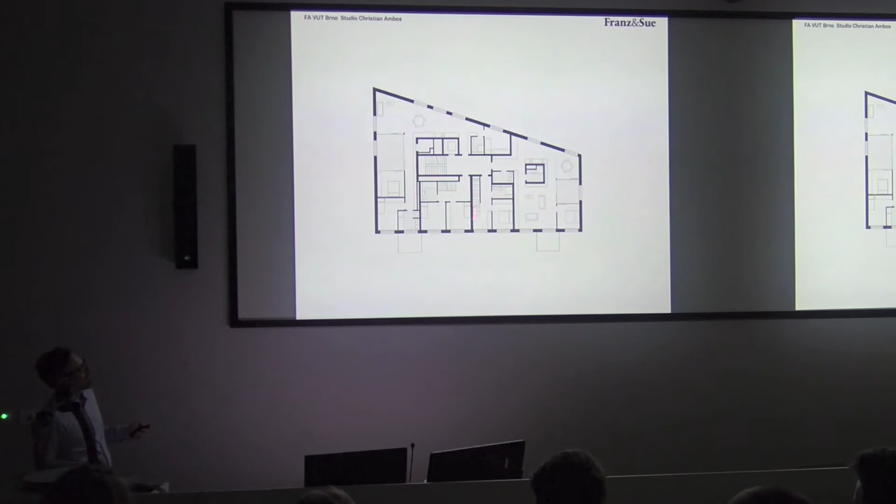And this is how it's going to look in about a year. We already started the construction. One interesting thing is we are working now with prefab concrete units with inside insulation - there's concrete on the outside and on the inside, and sandwich panels with insulation inside.

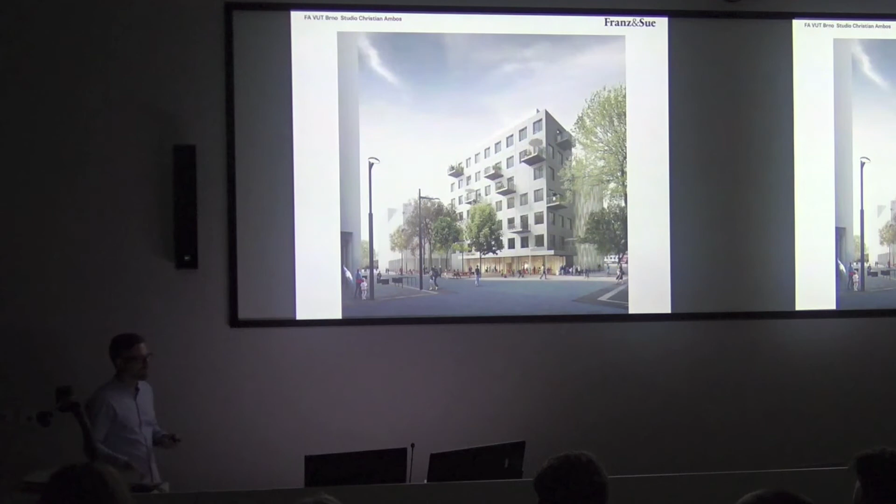We are doing a lot of scales. As you saw, we think big and we think small too. I just want to show you 2 kinds of different projects we are doing right now.

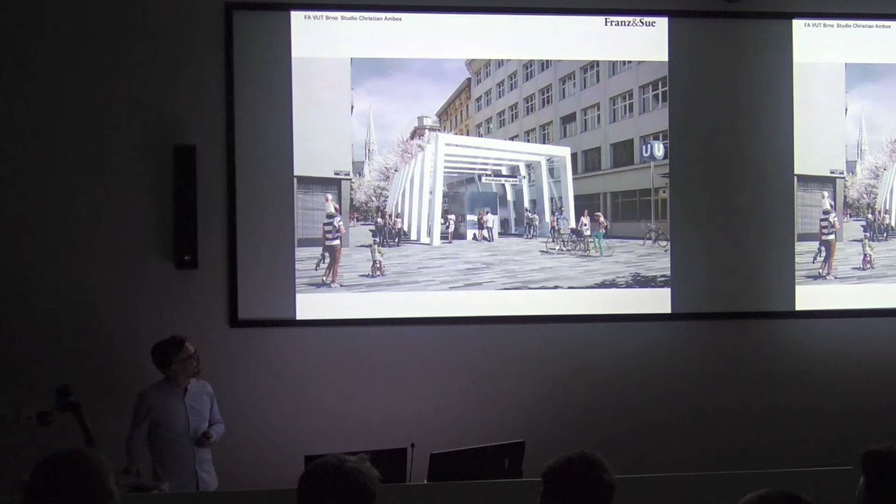This one is, we run the design for a new metro line in Vienna, the U5. And we're doing the first station buildings right now.

And we also do some really small scale work. This was a really beautiful project we did for a friend who got this house from his grandmother who died, and he asked us to do an intervention, just a very small scale intervention. He didn't want to demolish the house, he didn't want to build it up or renovate the whole house. He just wanted to bring the garden into the building, or the building to the garden.

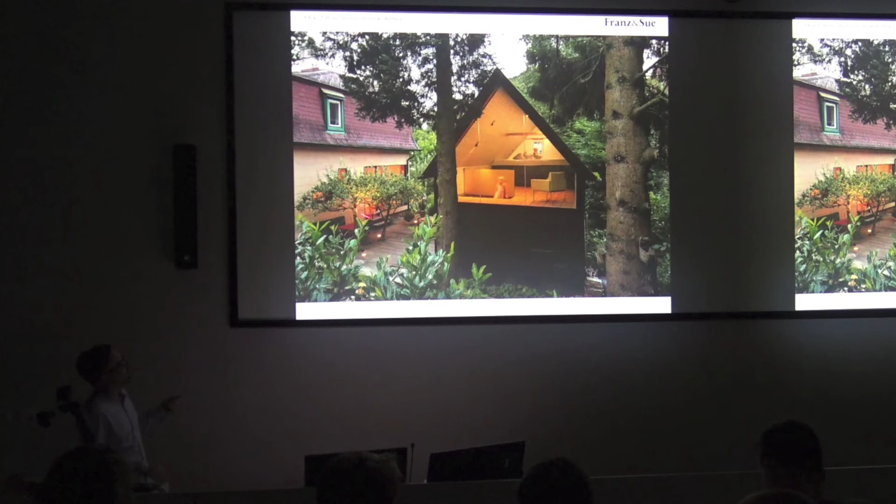So we opened up the building here, and in the second step, he had this kind of wooden shed, and he asked us, I need a working space in the summer. I don't need it in the winter, because in the winter I'm working in Vienna, but in the summer I need this kind of working space.

So we built this 100-year wooden shed. We just introduced this kind of glass facade here, and opened up the building from the inside. We placed these kind of wooden panels here, and you can enter the room through this kind of locked door - this golden door, you shift it up with a cord.